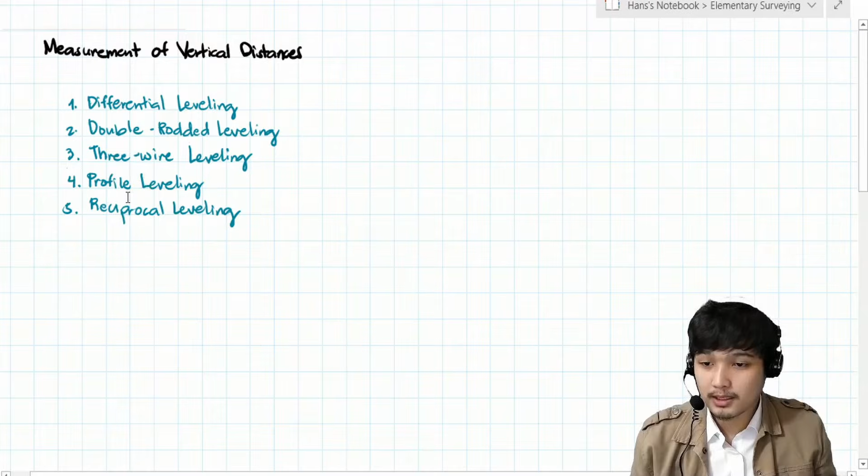So with that, we'll discuss the 5 methods used in determining elevation: differential leveling, double-rodded leveling, three-wire leveling, profile leveling, and reciprocal leveling. The common ones that appear in the board exam are differential and profile leveling. I added these two because they're almost the same as differential leveling.

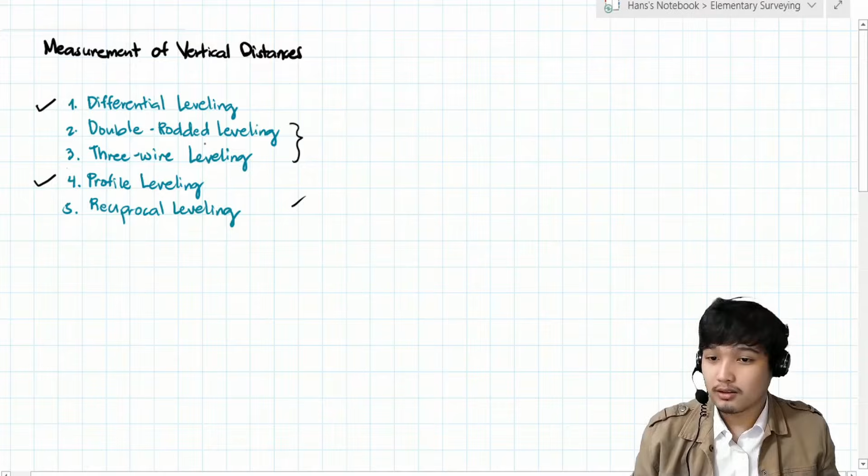So once we understand how these two work, differential and profile leveling, everything else becomes easy. Okay, so I think we can start our discussion with differential leveling.

Let's say this is our ground surface, side view. So there's a point on the surface, or any point on the earth, that we can use as a reference for our measurement. That point has either a known elevation or an assumed elevation.

Let's call that point A. So when this point has a predetermined value of elevation, it is called a benchmark. In this case, it becomes benchmark A, or BMA.

So again, a benchmark is used for referencing the elevation of other points on the ground surface. Let's say we want to know the elevation of this point, which we'll call point B, and we want to use it as another point of reference for future measurements. That means we want to convert it into a benchmark too.

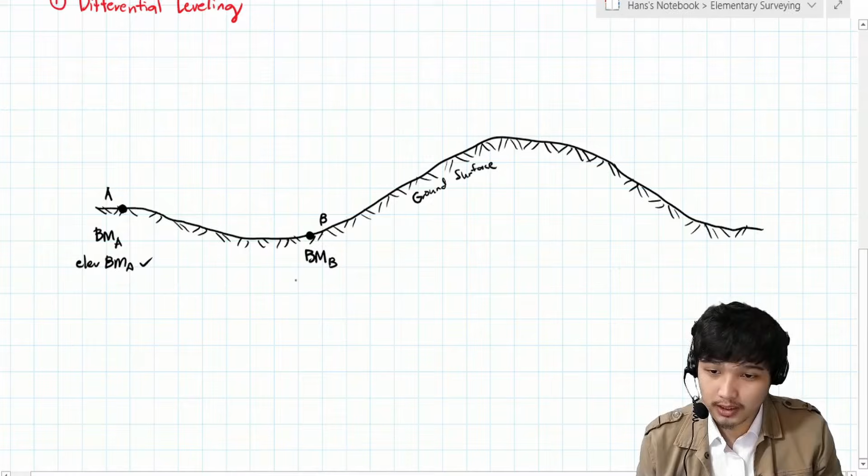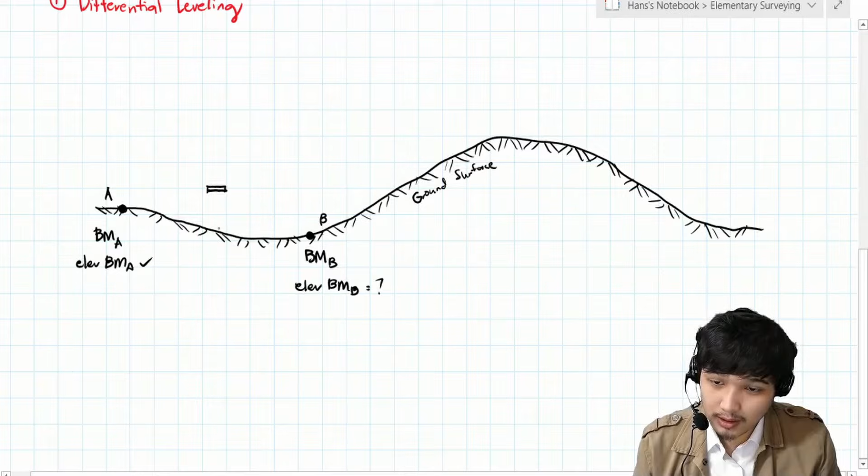So here's how it works. What we'll do is set up the instrument in between points A and B. Let's say this is our leveling instrument, the transit. So we set it up between A and B, then we place a rod at A and B.

So let's place it here. This is the rod at A, and then we have the rod at B.

So what we do here is simply measure the reading at A using a horizontal line of sight. We place the horizontal line of sight here. So it gets a reading at A, and whatever that reading is corresponds to this height, which we call the back sight. We call it back sight because we sight backwards toward the rod at A, from the middle hair reading down to the base.

And then we sight horizontally toward the rod at B. Whatever the reading is here corresponds to this height, which is our foresight. Now we'll make a small assumption here.

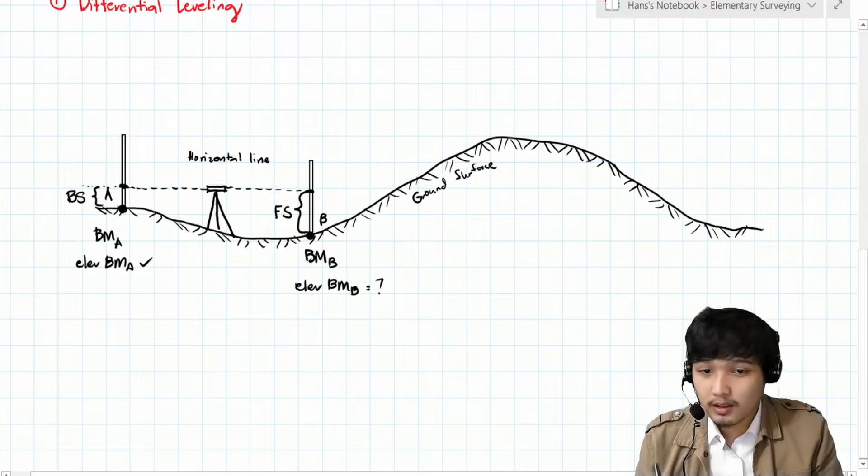This horizontal line is, of course, truly a horizontal line. But for very small or short horizontal distance measurements, that horizontal line can represent a level line. We'll discuss further in a future lesson the difference between a horizontal line and a level line, but for short distances, the horizontal line is essentially the same as the level line.

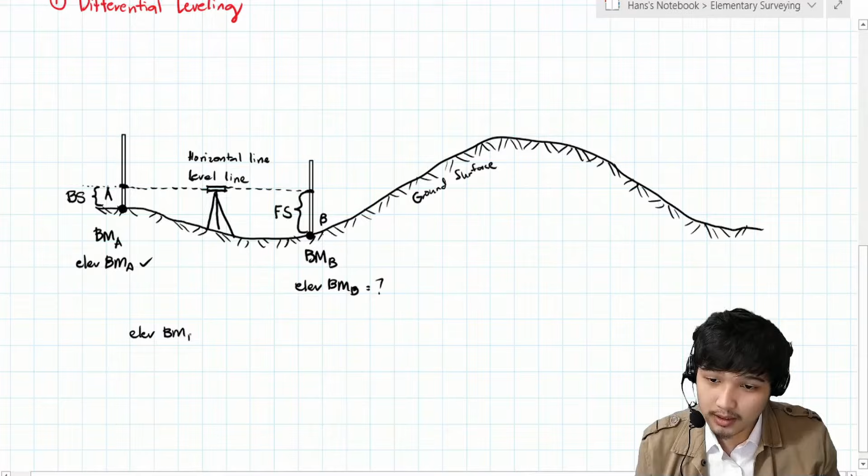So when we say level line, it's a line corresponding to points with the same elevation — meaning whatever elevation is on the left side of the line is the same as the elevation on the right side. Now, using the figure, how do we get the elevation of benchmark B? That elevation is equal to... the procedure is to always start from the point of known elevation.

So in this case, start tayo sa A. Magiging elevation ng benchmark A. Ang gagawin natin, mag-travel tayo upwards papunta doon sa level line. So from A, angat tayo papunta dito. So that is plus backsight.

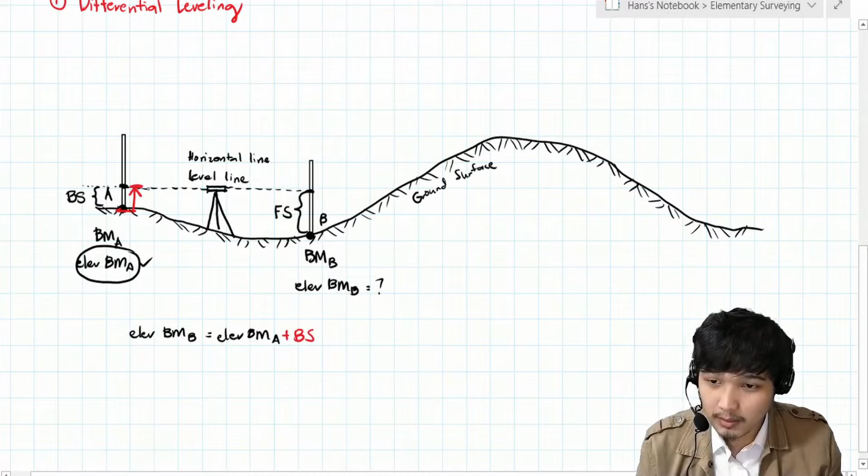So from the left side ng level line, makakapag-transfer na tayo dito sa right side. And then downward reading, which is yung foresight, so that is minus yung foresight. Nandun na tayo sa benchmark at B.

So therefore, the elevation at B is equal sa elevation at A plus the backsight at A, minus the foresight at B. Ganun lang siyang kasimple, class.

Problem dito class is ganito: what if gusto nating gawin din itong point of reference para sa future measurements natin, itong point na to, tawagin natin siyang point C. Gagawin din natin siyang benchmark C. Kailangan nating ma-determine yung elevation niya. Paano natin makukuha yung elevation dito sa C?

Ang gagawin natin, dahil itong elevation sa B is known na siya, pwede na tayo mag-set up in between B and C. Kaso class, pag nag-set up ako ng instrument in between B and C, paano yung mangyayari doon?

Okay, let's say ito. Kung nga dito ko siya lalagay, yung instrument, magkakaroon ng obstruction, tama ba? Kung dito, para makapag-read ako dito horizontally ng backsight, tapos pag nag-foresight ka, hindi mo magagawa kasi may obstruction.

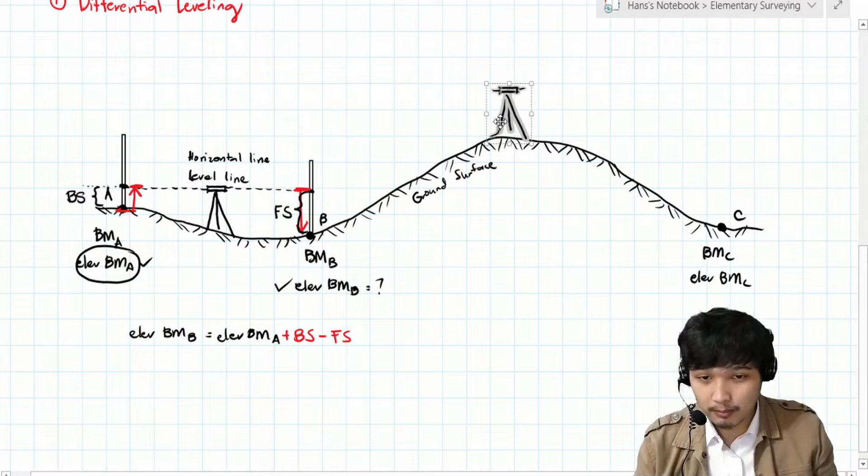Or ano pa? Pwede rin naman kung dito mo lalagay, so wait lang. Kung dito natin siya lalagay, hindi naman tayo makakapag-read correctly doon sa rod at B kasi limited lang yung height natin. So therefore class, dito na pupunta, dahil hindi natin kayang mag-read directly from B to C, maglalagay tayo ng mga turning points.

Itong mga turning points na to, class, i-determine rin natin yung elevation nila. Yun nga lang, class, that is for temporary use only. Gagamitin lang natin yung turning points para makuha natin yung gusto nating elevation, which is yung elevation ng benchmark at C. Ibig sabihin, class, let's say lagay tayo dito ng turning point. So let's say dito. Itong point na to, tatawagin ko siyang turning point 1.

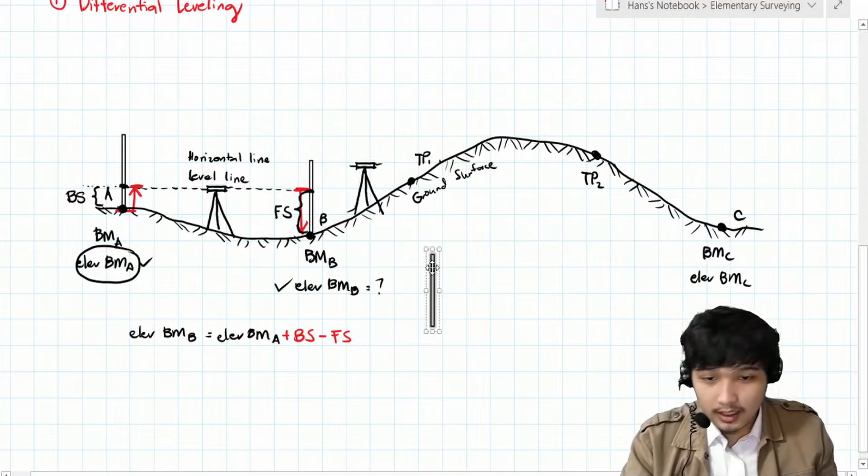So TP1. And then lagay pa ako dito class ng isa, siguro. So ito, TP2. Etong drawing ko class, medyo approximate lang siya. So lagay tayo ng instrument between B and turning point. So ganyan, let's say adjust ko lang ng konti. Ang gagawin, maglalagay tayo ng rod at B and then rod at the turning point.

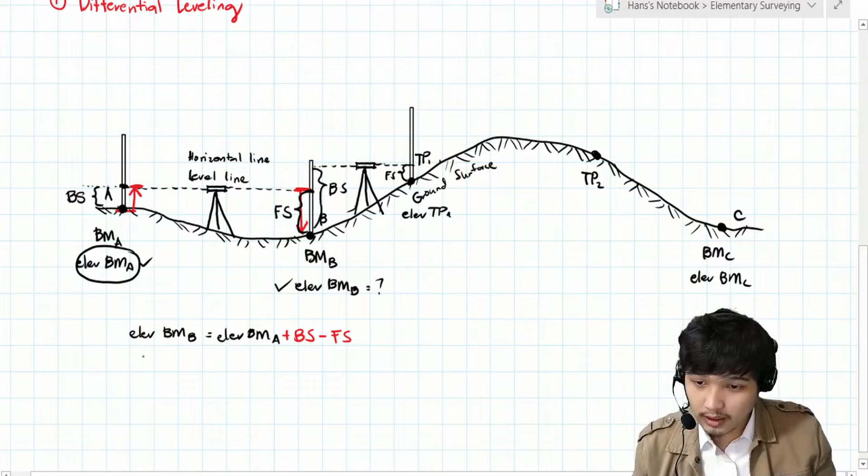So with that, kaya na nating class mag-backsight reading at B and then mag-foresight reading at the turning point. Dito magkakaroon tayo ng corresponding backsight at B, backsight and then foresight. Paano natin makukuha class yung elevation ng turning point 1? So that elevation ng turning point 1 is equal siya sa, from the known elevation, which is mag-start tayo sa B, dito tayo mag-start.

So from elevation ng benchmark at B, anong gagawin class? Magta-travel tayo upward and downward. So from B, aangat ako papunta dito sa level line. Ito kasi class is another level line, level line or horizontal line. Aangat ako ng backsight at B, and then bababa ako ng foresight at turning point. So in that case, nandun ka na sa turning point 1, sa TP1.

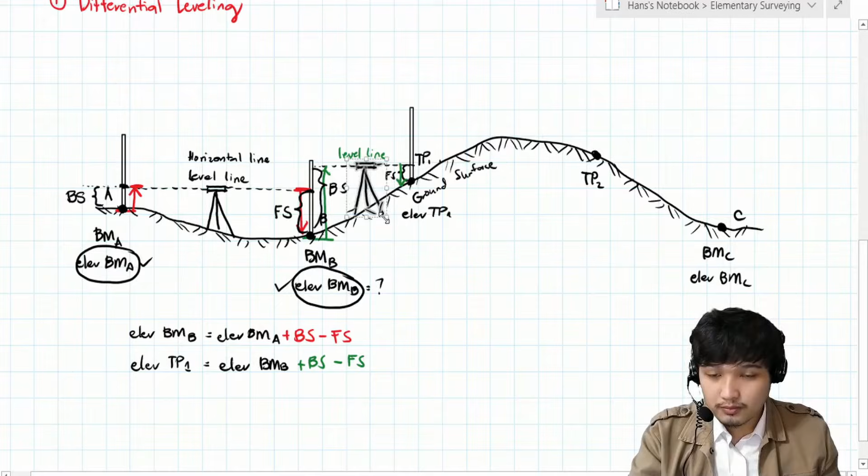So with that, another setup tayo ng instrument between TP1 and TP2. Okay, pwede na yan class. Anong gagawin? Setup ulit ng rod at TP1 saka sa rod at TP2. And then mag-sight tayo horizontally, horizontal line of sight.

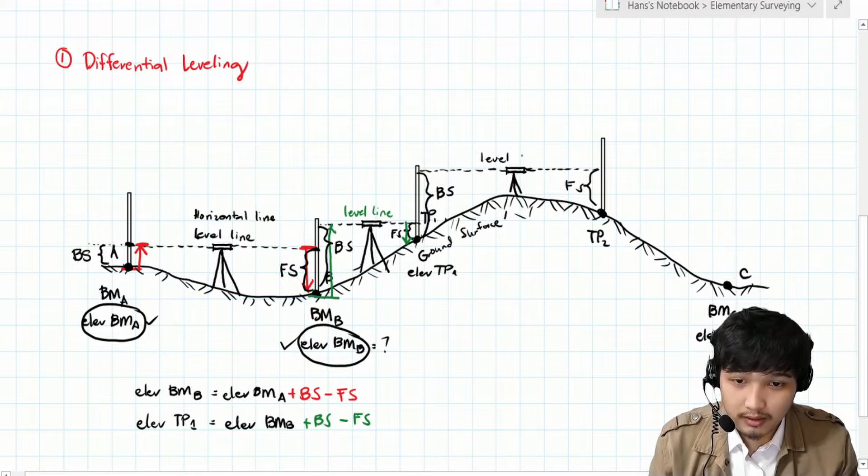So magkakaroon tayo ng backsight at the turning point 1 and then foresight sa turning point 2. Okay, so this one is another level line. So from the elevation ng turning point 1, kasi alam na natin siya, paano makukuha tong elevation nung turning point 2?

So ilan yan class? So that elevation ng turning point 2 is equal sa, start tayo sa TP1. So from TP1, aangat tayo ng backsight and then bababa tayo ng foresight. So that is plus backsight sa TP1 minus yung foresight sa TP2. And then finally, last setup in between TP2 and then benchmark C.

Okay so, lagay tayo ng rod at C, and then sight tayo horizontally. So that is horizontal line. So may small reading dito. So this one is backsight and then dito this one is foresight.

So another level line. So therefore, with the known elevation ng TP2, makuha na natin yung gusto talaga nating makuha na elevation, yun yung benchmark C.

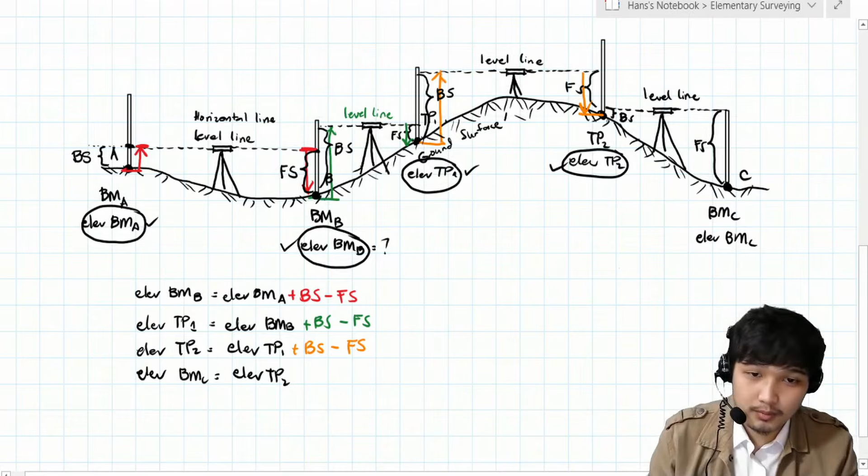So that elevation ng benchmark at C is equal sa elevation ng reference natin ng TP2. And then anong gagawin class? So from TP2, angat tayo ng backsight and then baba tayo ng foresight. So that is plus backsight and then minus the foresight. Okay, medyo naging mahaba yung discussion sa kanya, pero gusto ko lang ipakita na ganyan yung proseso na ginagawa when it comes to differential leveling.

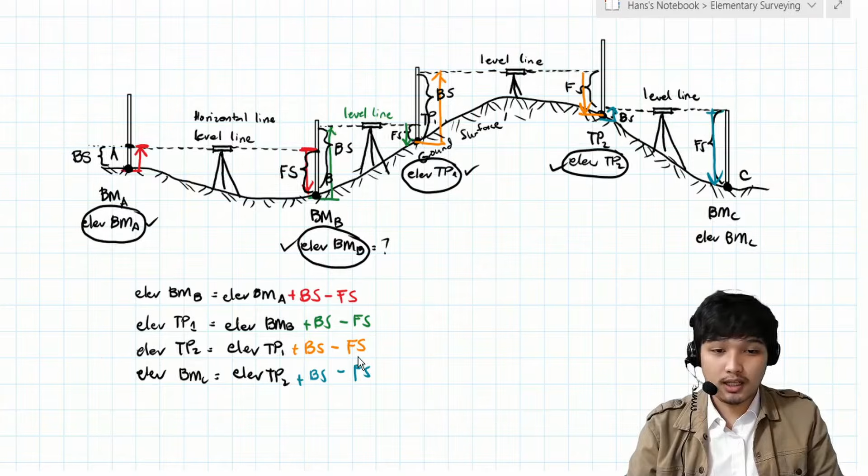Take note class, yung benchmark, ito yung point na gusto natin magkaroon ng elevation, para sa purpose ng future reference sa ating mga future measurements. While yung turning point naman, ito yung mga points na kinukuhaanan natin ng elevation for the purpose of temporary use only.

Okay, so anong napansin mo pala class na trend? 'Di ba ang nakita mong trend is yung backsight is always additive, okay? And then yung foresight is always deductive. So yun yung magiging general formula for this one, anong magiging general formula?

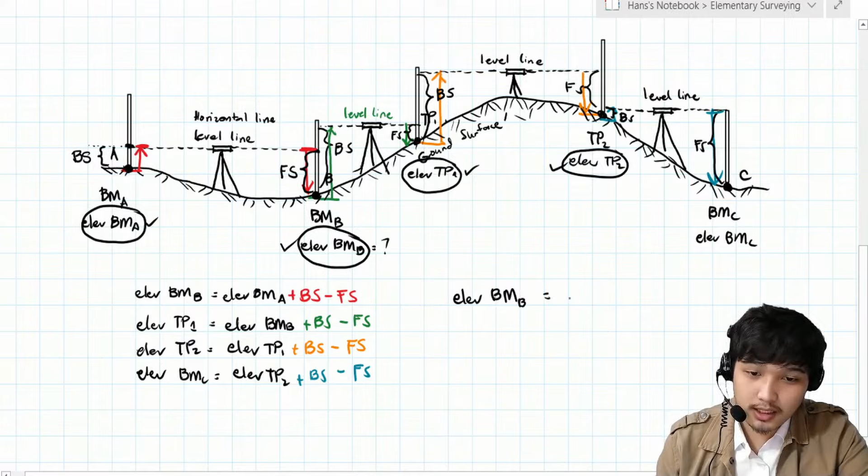Elevation ng any benchmark, okay let's say B na lang, is equal saan? Doon sa elevation nung reference point natin, which is yung benchmark ng A, plus. Kung maraming setup in between B and A, therefore we have to sum yung all backsight, plus all backsight, and then minus the summation ng all foresight between A and B.

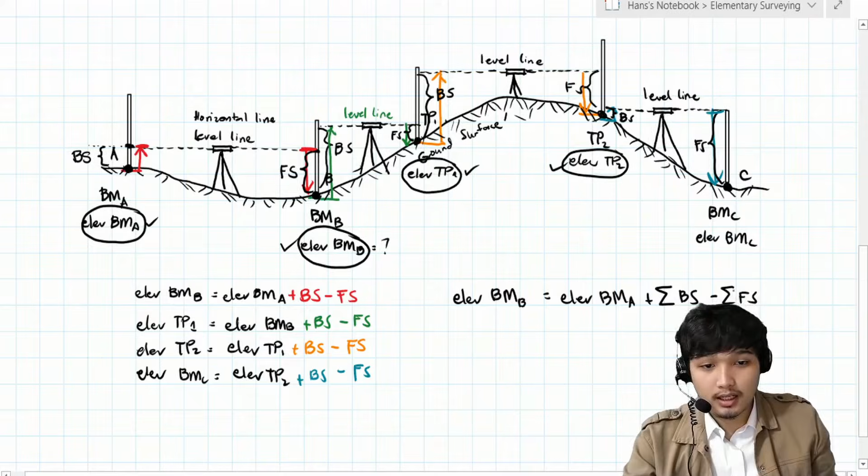Okay, take note lang class, kung makikita mong trend dito, eto class. Kung mapansin mo yung foresight, ito yung foresight sa benchmark C. Etong backsight, ito yung backsight sa TP2. Tama ba? So dito naman, for relationship between TP2 saka TP1, ito yung foresight sa TP2, ito naman yung backsight sa TP1.

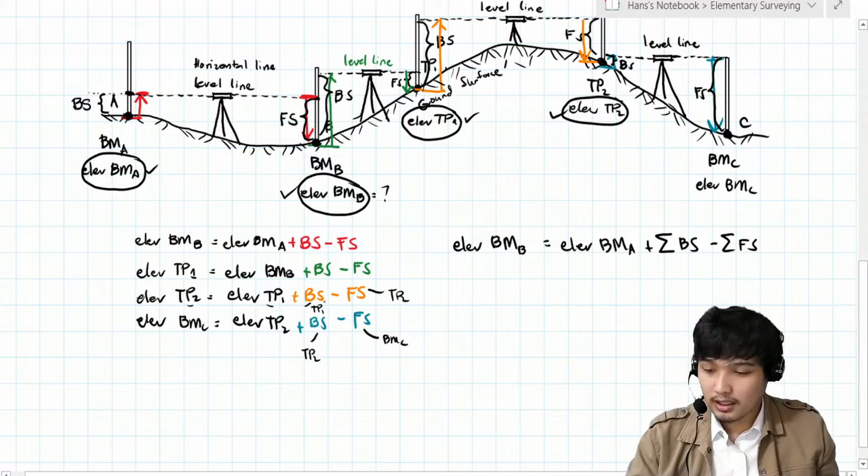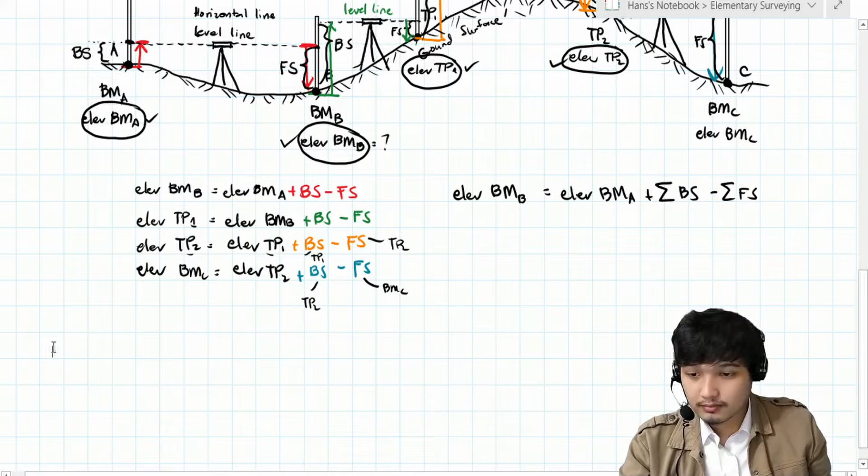Okay, pinakita ko lang class para ma-apply natin siya later on sa ating problem solving. I think pwede na tayong mag-proceed sa ating sample problem para mas maintindihan natin siya. So, copy ko lang. Okay, so let's say ito yung problem.

Situation number 8. Given the following differential level notes, we have stations benchmark A. Between A and B, meron TP1, TP2, TP3. And then between benchmark B and C, we have TP4 and TP5. So yung meron lang tayo class dito is yung elevation ng A. Lagay natin dito, elevation ng benchmark A, which is equal sa 346.50

meters. So the question is, determine the elevation netong C, yung nasa dulong-dulo, and then difference in elevation between benchmark B and C, and then determine the station which has the highest elevation. So pwede natin to class i-solve isa-isahin.

So let's say we want to solve muna. Syempre, bago kasi tayo makapunta dun sa benchmark C, kailangan dumaan muna tayo dito sa lahat ng unknowns na to. So therefore kailangan natin kunin tong elevation ng TP1. So yung elevation ng TP1 equal yung class saan? Yung reference natin, tama ba? Yung reference natin, yung 346.50, tapos anong gagawin? Yung backsight sa reference, so plus yung backsight sa reference, which is ito.

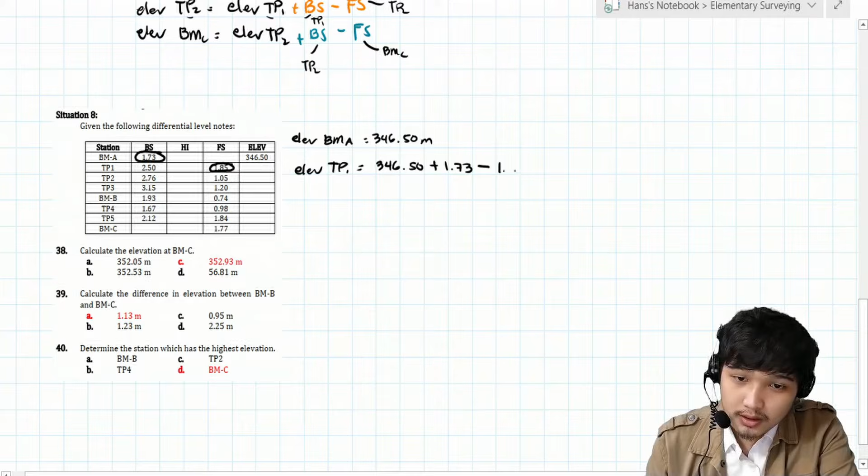So tama ba class? Balikan natin, halimbawa ito. So etong una na to. Paano to nabuo? Diba? From a reference, ito yung reference natin. At anong ginawa? Ipa-plus natin yung naging backsight sa reference. Diba ito yung naging backsight sa reference? So backsight sa reference.

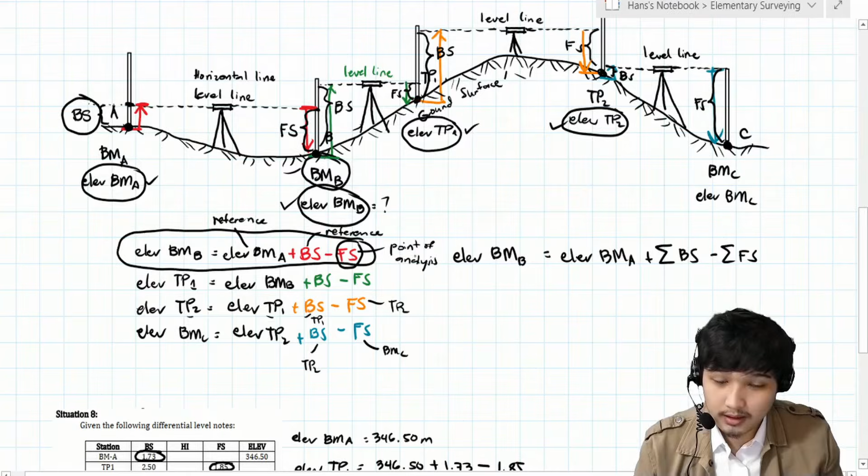At itong foresight, kanino to foresight? Diba foresight yan dun sa point of analysis, itong benchmark B. So ito is yung foresight sa point of analysis. Gets? So kung babalikan natin to class, yung elevation ng TP1 is equal sa benchmark at A, tapos yung backsight dun sa A, and then yung foresight dun sa point of analysis, which is itong 1.85. Or pwede natin siyang i-highlight using this figure.

Para mas maging madali yung magiging feature analysis natin as the relationship netong diagonal na to. Okay, so plus this one, then minus this one. So therefore, ilan yung elevation ng TP1? Okay, so sagot is 346.38.

Okay, so therefore pwede na nating i-fill up itong level note natin. So, 346.38.

Okay, so next, since meron na tayong elevation ng TP1, pwede na natin siyang gamiting reference for determining the elevation ng TP2. So ganun ulit, elevation ng TP2 is equal sa reference natin, which is yung 346.38, plus yung backsight sa reference, minus yung foresight doon sa point of analysis. So that is plus 2.5, minus 1.05. Elevation ng TP2 equals 347.83. So fill up natin.

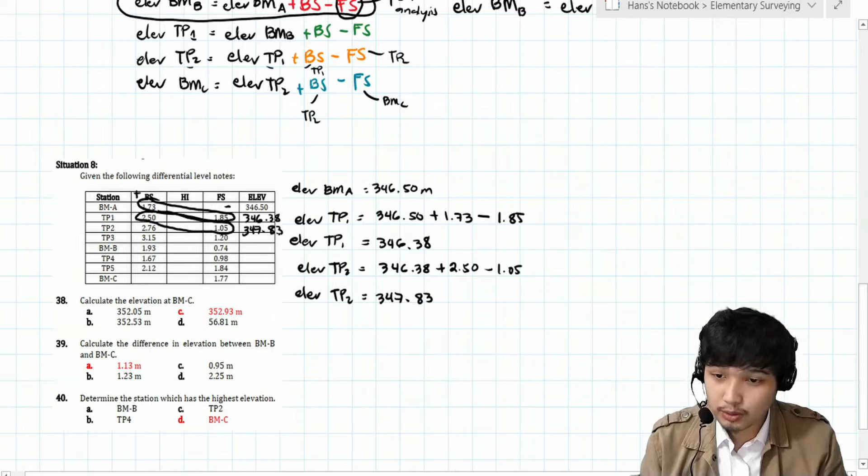So we have to do the same procedure sa lahat ng measurements natin dito, para makuha natin lahat ng elevation. Gets na ba yan, class? So for elevation ng TP3, ang magiging reference naman natin dito is yung previous measurement, yung TP2.

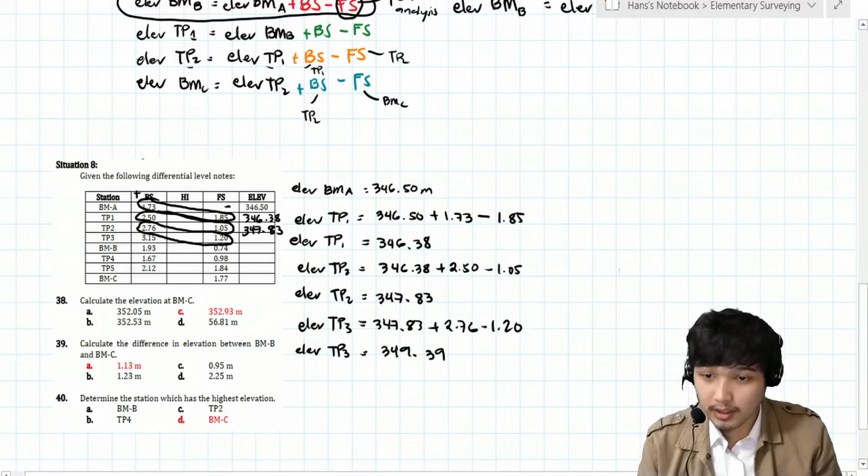So that is 347.83, plus yung backsight sa reference sa TP2, minus yung foresight doon sa point of analysis. So that is plus 2.76 minus 1.2. So elevation ng TP3 equals 349.39. Tapos gawin na lang natin yung class repeatedly hanggang sa ma-fill up natin itong table. So sige, class.

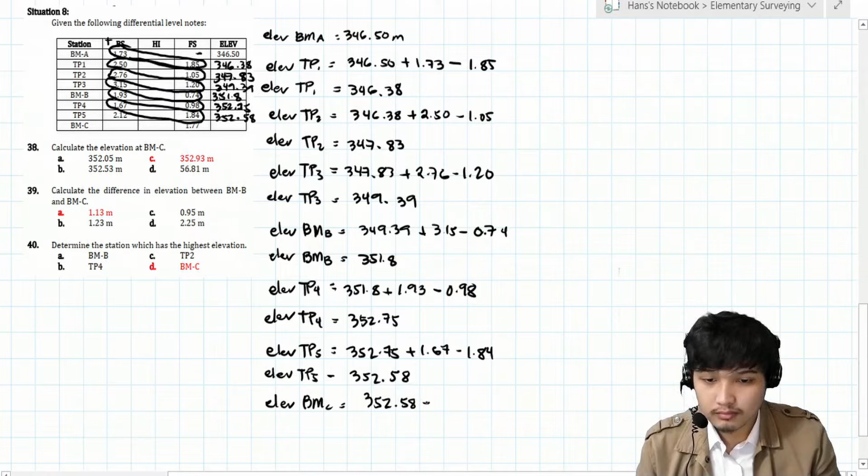Okay, so ayan, na-fill up na natin lahat ng data. So this one is 352.93. So kaya na natin, class, masagot isa-isa yung mga hinahanap.

So we have here elevation ng benchmark C. So that is yung ito, 352.93.

So correct. Okay, so next, calculate the difference in elevation between benchmark B and benchmark C. So therefore, yung difference in elevation na yun, which is yung H, is equal lang naman sa difference ng elevation nila. So benchmark C minus benchmark B.

So difference is simply 352.93 minus sa B, ilan yan? 351.8. So ang sagot ay 1.13 meter. So that is letter A.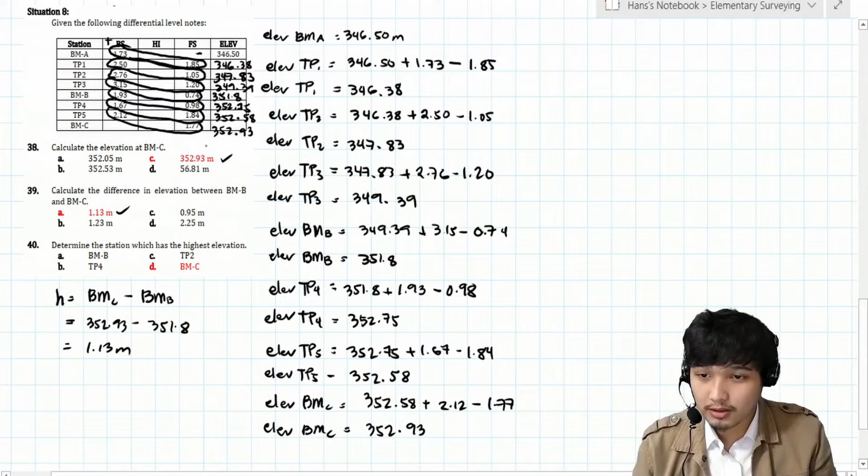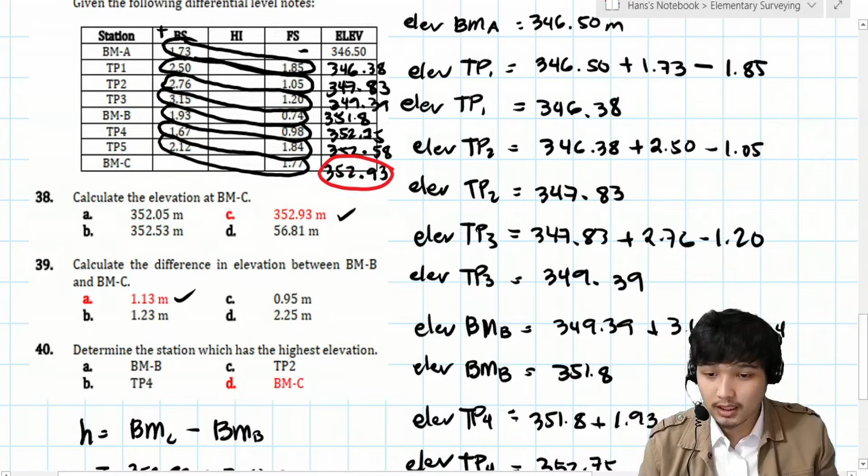And then finally, determine the station which has the highest elevation. So from this table na nabuo natin, sino dyan, class, yung may pinakamalaki? So 346, 346, 349, 351, 352. So yung pinakamalaki, class, is itong 352.93.

So, ibig sabihin class, among all those points, ang pinakamataas sa kanila is itong benchmark C. Okay, so ganun lang naman siya class. Medyo tedious lang siya kasi iisa-isahin mo talaga yung mga elevation bago ka mapunta dun sa point C. So inisa-isa muna natin. So take note lang class yung naging ginawa natin, yung reference and then point of analysis.

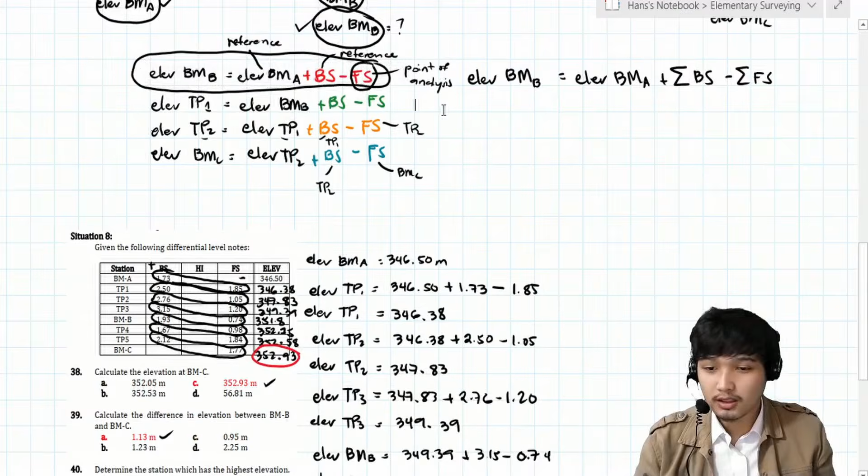Ngayon class, yun nga, ang mahirap kasi dito is iisa-isahin mo siya. Okay, pero class, actually, pwede naman natin siya ma-solve ng mas mabilis na way. Yun nga lang, sa problem na to, kailangan natin siyang gawin since kailangan kasi itong isolve, yung highest elevation. So ibig sabihin, kailangan natin malaman yung elevation lahat ng points.

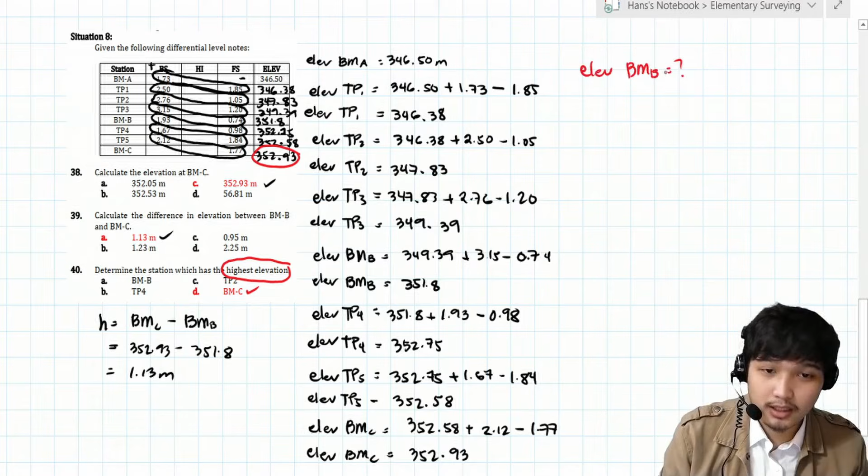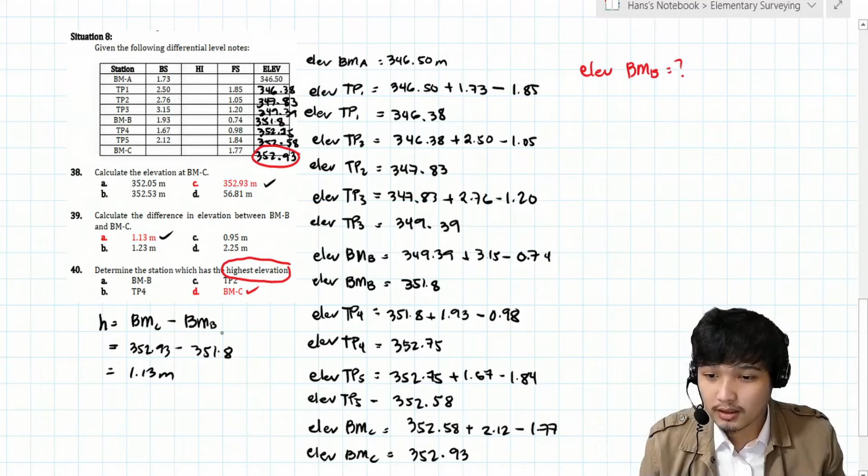Pero class, kung halimbawa, ang tinatanong lang class is yung elevation ng benchmark B, halimbawa siya lang yung tinatanong. So paano siya directly masosolve nang hindi na iniisa-isa to? Okay, so let's say delete ko ito, class. So paano makukuha? Let's say, ano ba yung sagot sa benchmark B? Di ba ito yung 351.8? So i-ano ko lang, class, dapat ang answer 351.8. So delete natin ito.

Okay, so let's say, ang tinatanong yung benchmark B, elevation niya. Pero ang meron lang tayo yung elevation ng A. So paano tayo makakapuntang B? So same pa rin naman ang procedure.

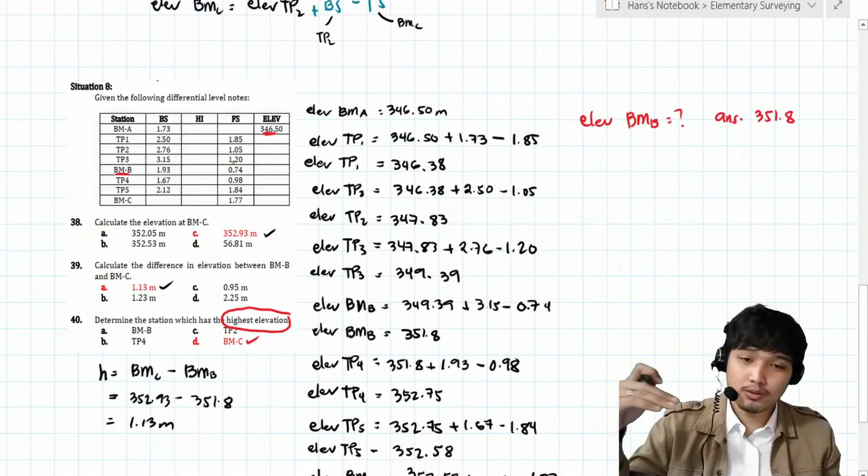Sabi nga natin, gagamitin na natin itong formula na ito, na yung elevation at any point is equal sa elevation nung reference natin plus yung lahat nung backsight mula dun sa reference natin and then lahat nung foresight hanggang doon sa point of analysis. So di ba class, kanina nakita mo na inclined, yung mga oblong na ginagamit natin. Halimbawa, ganito. Tama ba? So inclined yung relationship. Kasi nga, yung backsight na kailangan natin is yung backsight sa previous readings.

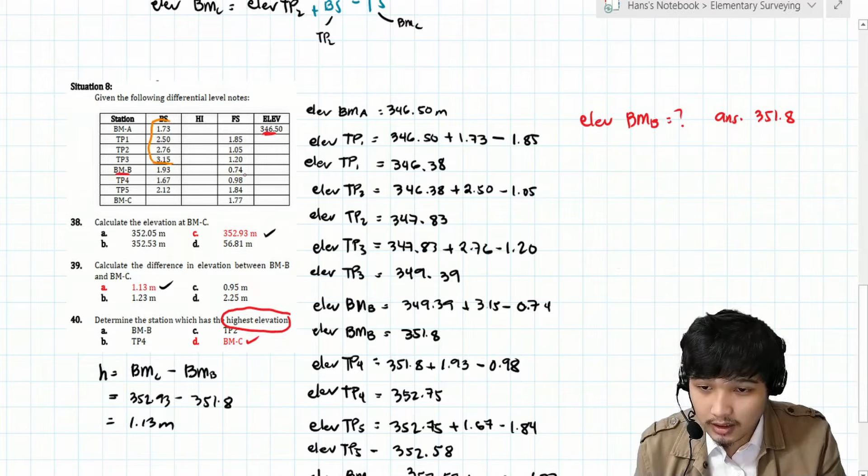Or previous setup. Tapos yung foresight, kailangan natin yung foresight hanggang doon sa point of analysis. So ibig sabihin, ang gagawin lang natin, lahat ng backsight mula doon sa previous reading, hanggang dito. So hindi kasama yung benchmark B. So lahat ng previous backsight and then lahat ng foresight hanggang doon sa point of analysis. So parang ang mangyayari is, wait lang, parang inclined pa rin naman siya, pero mas malaki na yung oblong. So parang ganito.

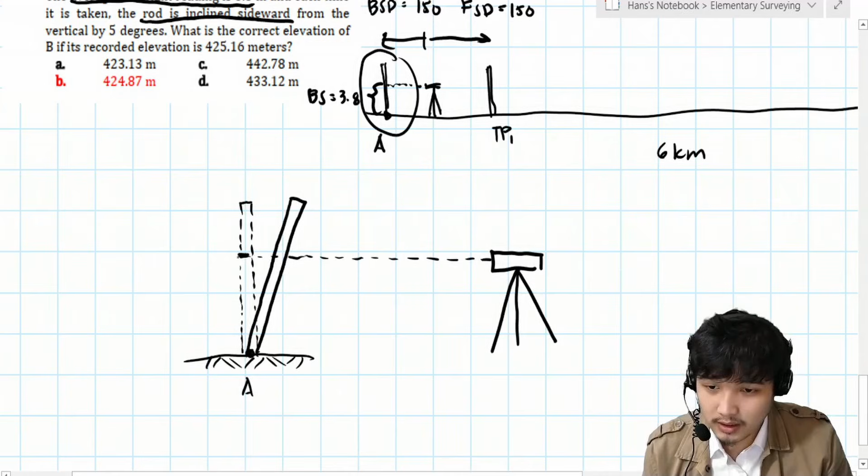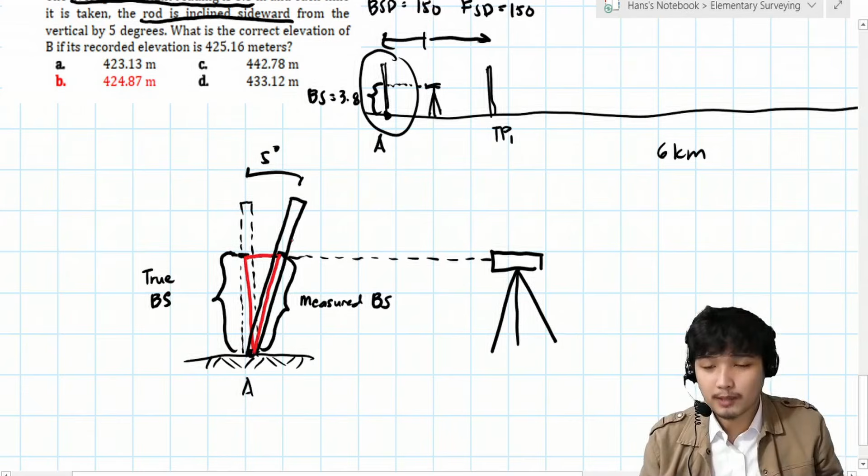True back sight. Pero dahil naka-inclined by 5 degrees yung kanyang rod, ang na-read niya is ito. Which is parang ito yun, yung measured back sight. Kung mapansin mo class, sa triangle na yan, di hamak na mas malaki yan compared dito sa true. Ibig sabihin meron siyang error dun sa reading. Every time na mag-read siya ng back sight distance, meron siyang error.

Sabi ito daw is equal sa 3.8. Ilan yung magiging true na back sight using yung triangle? That is by cosine. Cosine of 5 degrees equals adjacent in true back sight over hypotenuse na 3.8. So yung true back sight equals 3.8 cosine of 5.

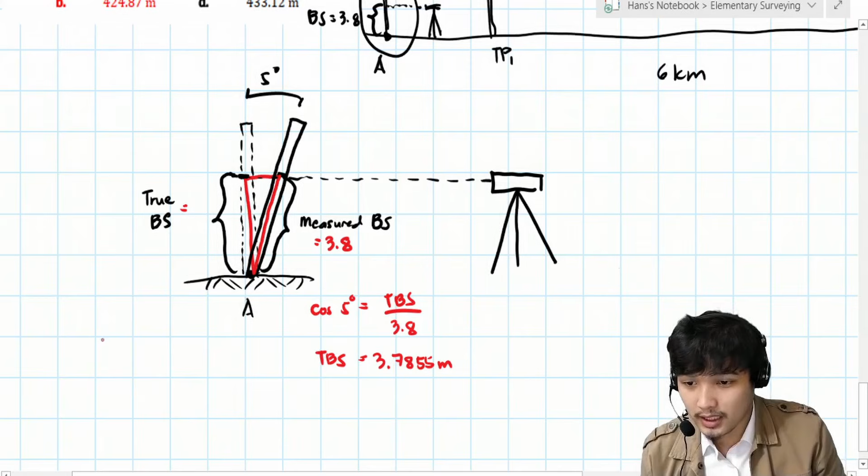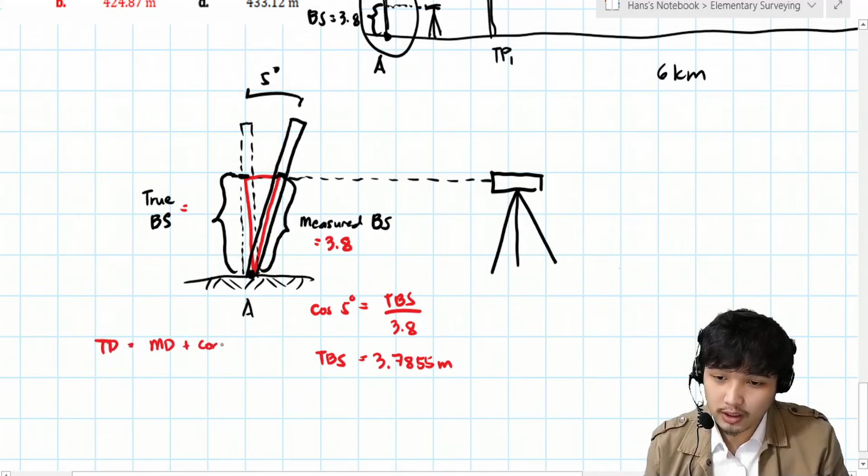So this one is 3.7855 meters. Ibig sabihin, yung na-measure niya is a way greater than this one. Ilan yung correction, class? Pwede natin gamitin yung basic formula nung taping pa before, na yung true distance is equal sa measured distance plus correction. Yung true distance 3.7855, equals measured is 3.8 plus yung applied nating correction.

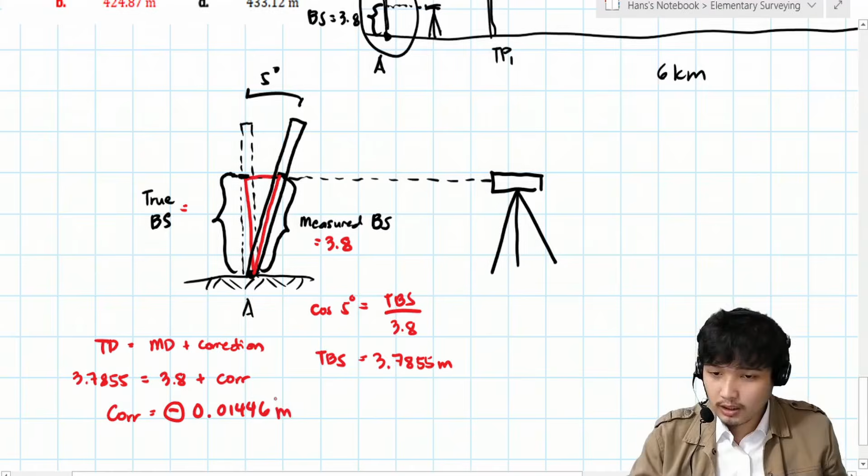So yung magiging correction dito is what? Negative, ibig sabihin deductive. Dapat ibabawas natin siya. So yung magiging correction dyan is negative. Para ma-correct daw yung measurement, dapat magbawas tayo ng 0.01446 meters. Etong correction na to, class, is for every back sight measurement.

Ilang back sight ba yung gagawin natin dito? From the figure, ito, isang back sight reading. Ilang back sight yan? Kasi dito, set up ka ulit dyan. Therefore, another back sight reading. Setup ulit, another back sight reading. Nagigets niyo ba? Another setup, another back sight reading, until such time na makover niya yung total distance of 6 kilometers.

Ilang setup ng back sight yung mangyayari dyan, class? That is simply, ito, class, is 300 meters per one setup. Therefore, yung number of setup is equal sa 6,000 meters, yung 6 kilometers divided by 300 meters. So that is 20 setups.

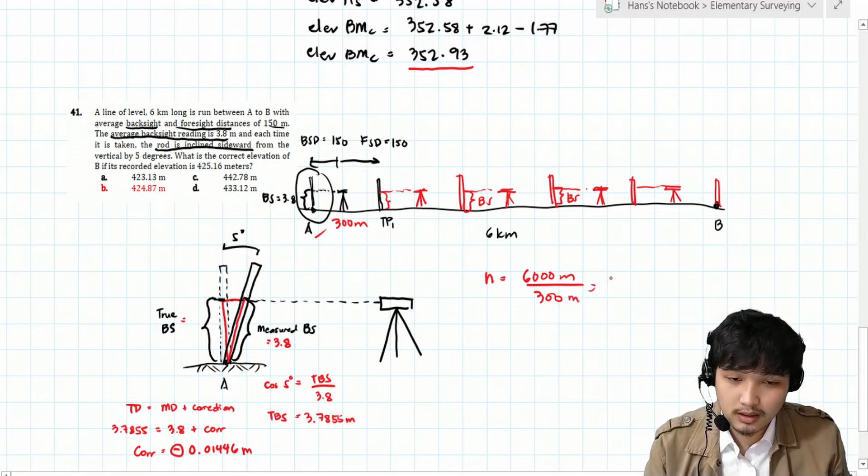Okay, so 20 setups. Kahit 20 times natin ibabawas itong correction na to doon sa ating back sight. Di ba, class, ang formula for benchmark at B is equal yun sa benchmark at A plus summation ng back sight minus summation ng foresight. Previously daw, using yung erroneous value ng benchmark, nakuha niya ito as 425.16. Para makuha natin yung true reading para sa elevation ng benchmark at B, equal yun plus saan? Sa true benchmark at A, pwede ko na lang isulat as benchmark at A, since wala naman sinabing error before doon.

As is na lang natin siya. Ito, yung summation ng backsight, erroneous yan, so kailangan i-correct natin siya. Magiging summation ng true backsight dapat. Ito minus summation ng foresight, i-adapt ko na lang ulit, kasi nga wala namang error sa kanila, so kakopy ko na lang sila, para makuha natin itong class, summation ng true backsight.

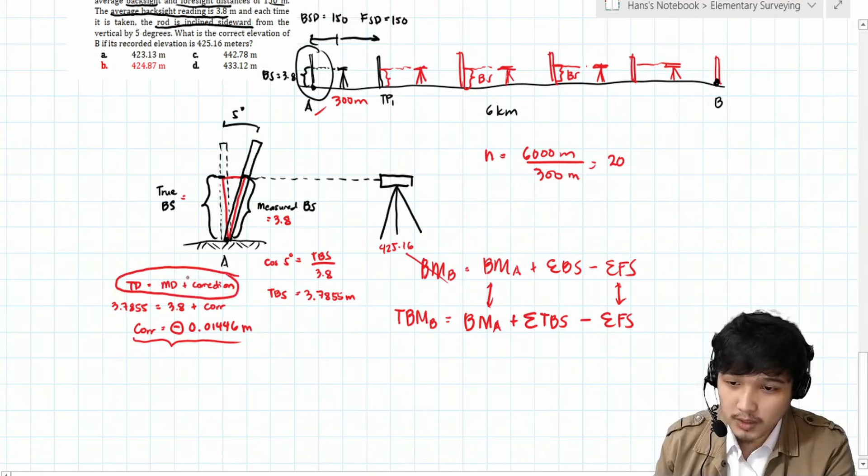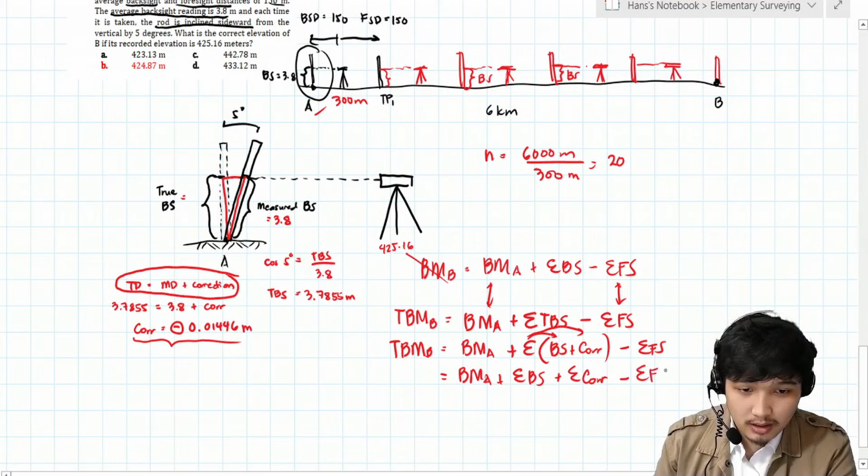Always, palagi natin gagamitin itong ganitong relationship: true distance equals measured distance plus correction. Therefore ito magiging measured distance, which is yung backsight alone, plus corrections. Minus summation ng foresight, and this one is benchmark at A. So equivalent sa true benchmark at B. Simplifying this one further, magiging benchmark at A plus summation ng backsight, plus summation ng corrections, minus summation ng foresight. Nakikita po ba? Okay, nakikita pa naman. Ayan, sana nakakasunod kayo, class.

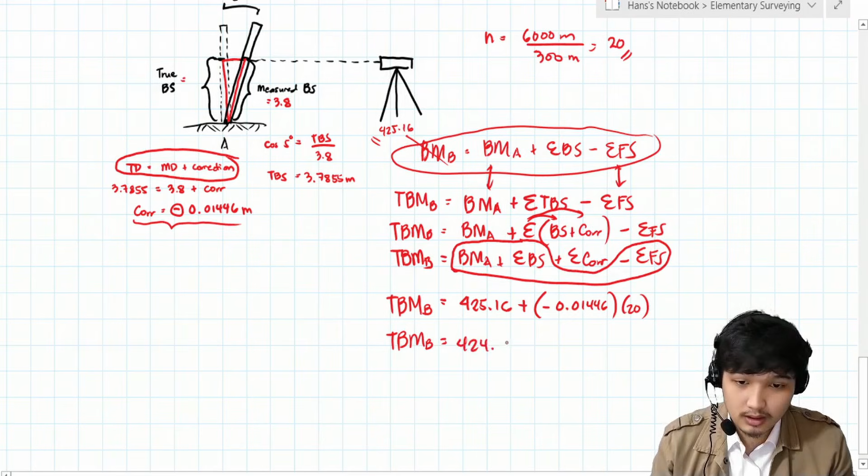True benchmark at B. Etong expression na to, benchmark at A plus yung erroneous reading na backsight minus yung foresight, is equal dito yan, which is equal yun sa 425.16. May natitira dito na plus summation ng correction. Yung correction natin, negative, so plus negative 0.01446. Gaano karaming beses to, class? Nangyari? 20 times, so times 20. Therefore, ang true elevation ng benchmark at B is equal to... sagot is 424.87 meters.

So that is letter B, correct. Hopefully guys, na gets nyo kung paano nag-work yung differential leveling na method of measurement of vertical distances and how to correct it.